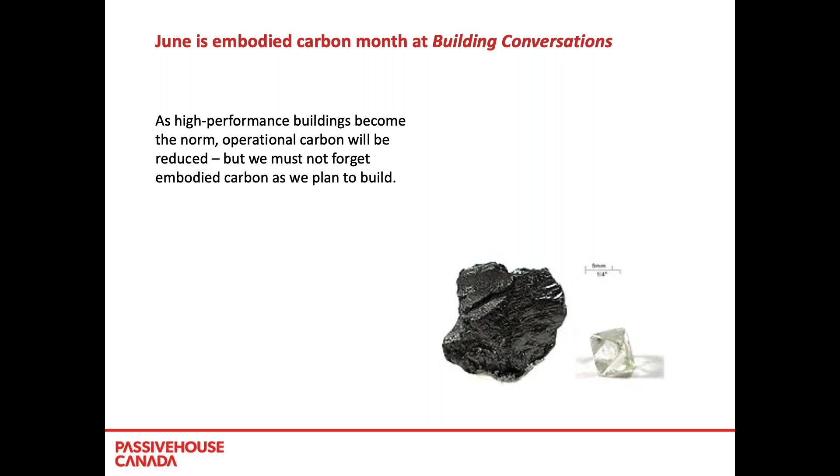So embodied carbon is the carbon footprint of a material, and it considers how many greenhouse gases are released throughout the supply chain, and it's often measured from cradle to factory gate or cradle to construction site. But our guest today, I know, will have a more fulsome description of what embodied carbon is. So let's move along.

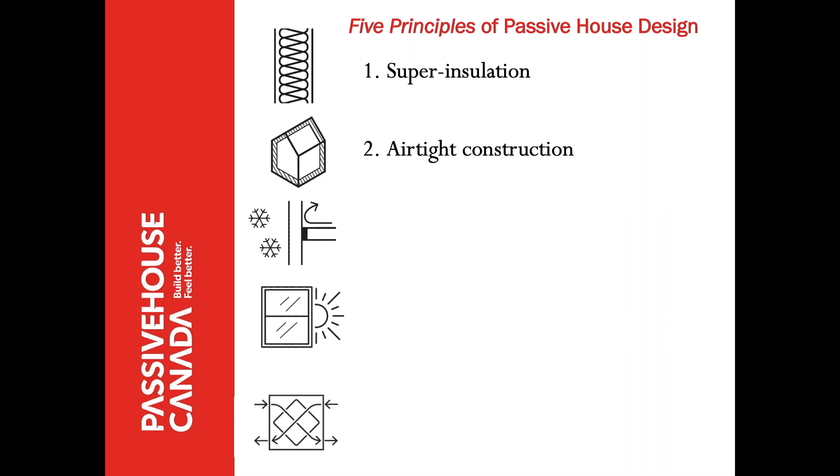So what is a passive house? And I'm going to assume that most of you on the webinar know a fair amount about passive house, but for those who don't, there are 5 principles of passive house design. And the first principle is that the building envelope has to be super insulated. So thick walls with lots of good quality insulation. And I know Anthony will be talking to us a bit about insulation later on. Second principle is that it has to be airtight construction. We can't have air leaving or entering the building.

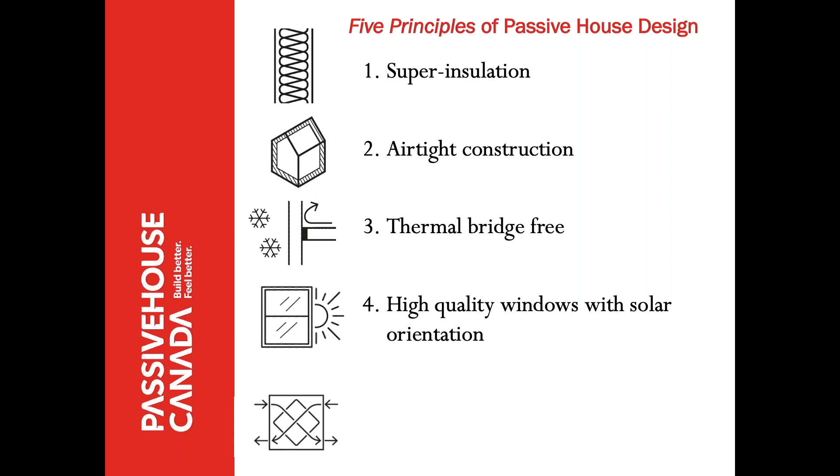Third principle is that it has to be thermal bridge free. We have to make sure there's no easy access for the cold or the heat to get in, or the cool or the warmth to get out. Fourth principle is that there must be high quality windows with solar orientation. So not only do we have to have good quality triple pane passive house windows, they have to be pointed in a way that maximizes the warmth that comes into the building in the cold months and minimizes the amount of heat that enters the building during the hot months.

And the fifth principle is there has to be a really top-notch ventilation system with heat recovery, and it's absolutely spectacular. When you add these 5 principles together, you get a healthy, comfortable, resilient, affordable, and low energy, low operational carbon building.

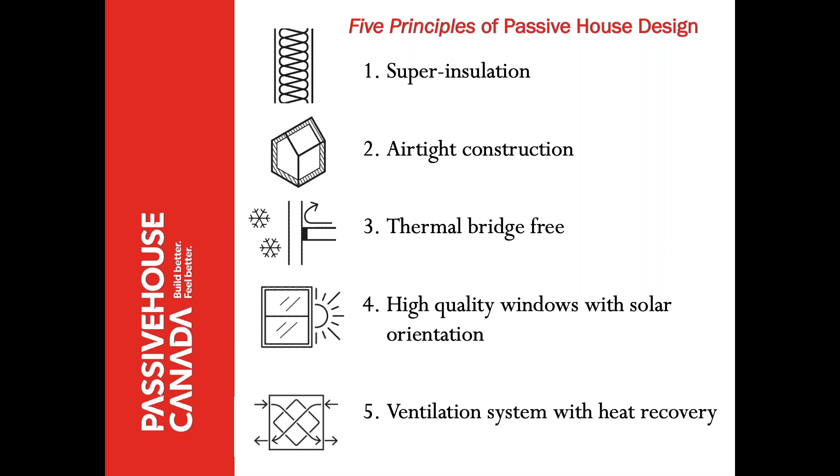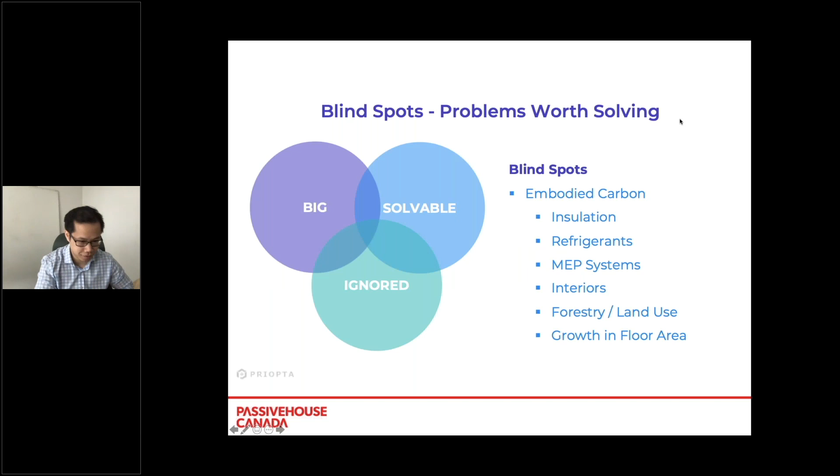So Anthony, now's the time for you to turn on your camera, and we'll make ourselves known to the folks in the audience here. As soon as I can get to, there we are. Perfect. Thanks for inviting me to this conversation. And thank you for being here. I have to turn on too. There we are. We're here. A little bit of technical. I've only done this about, I don't know, a dozen times or more. You think I'd understand by now.

But listen, thank you very much for being here and taking some time to talk to us about embodied carbon during Embodied Carbon Month at Building Conversations. Maybe you can start at the very beginning for people like me who are relatively new to high performance building, and in your words, talk to us about what embodied carbon is and why it is important that we pay attention to it. Perfect. Yeah, great. And actually, I think that in this first part, we probably don't even need any slides. I can just kind of talk through some of these things. Sure. And I've put a few of your slides in, so let me know when you want to move through them. Oh, sure. Sounds good.

Well, again, thank you for inviting me for this conversation. And in my time, I've gone through passive house certified training before as well, so I'm connected with some of the people in this community, and I've been really impressed with how much people within this passive house community have really taken up this topic. When we're talking about embodied carbon, we're really looking at the environmental impacts associated with all of the construction materials used in a building.

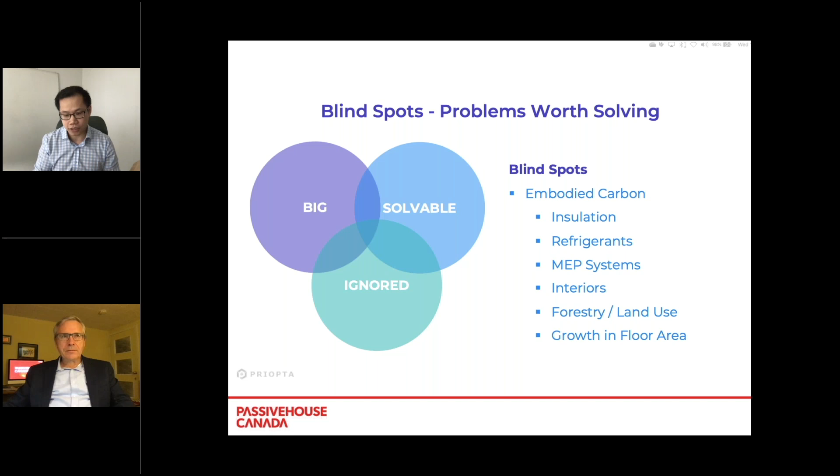I think last year when I wrote my first and probably only article so far, I titled it Embodied Carbon, the Blind Spot of the Building Industry. And it really has been a blind spot for a long time. There definitely have been certain people within the building industry that have focused on embodied carbon, but it's been a relatively ignored or neglected area. And only now do we start to see it actually being addressed on more construction projects.

So the first blind spot is the field of embodied carbon itself, right? As we talked about earlier, most of the focus has been on operational carbon. We haven't looked at embodied carbon as much, which makes up about 11% of global annual CO2 emissions. But even within the topic of embodied carbon, I think there are multiple blind spots. There are blind spots within the blind spot.

And so in this graphic, what I'm showing here is that when you're thinking about what problems are worth solving, you want to find a problem that's really big, that has big consequences, or in our case, a big amount of carbon emissions associated with it, and that it's solvable. So it's something that we can do something about. We have strategies for addressing or reducing those emissions. And then it's also ignored.

And that ignored piece is a big deal because as much as we've had a ton of focus on operational carbon, which is super important, I think because this topic has been so neglected, there's a ton of opportunity. There's a lot of emission reduction potential there.

So some of those subtopics that I mentioned there: within embodied carbon, within certain types of insulation, I think we've underestimated how significant those emissions are. So I have a slide later where we'll talk a bit about that, in particular with XPS and spray foam insulation. Refrigerants, actually, let me back up a bit.

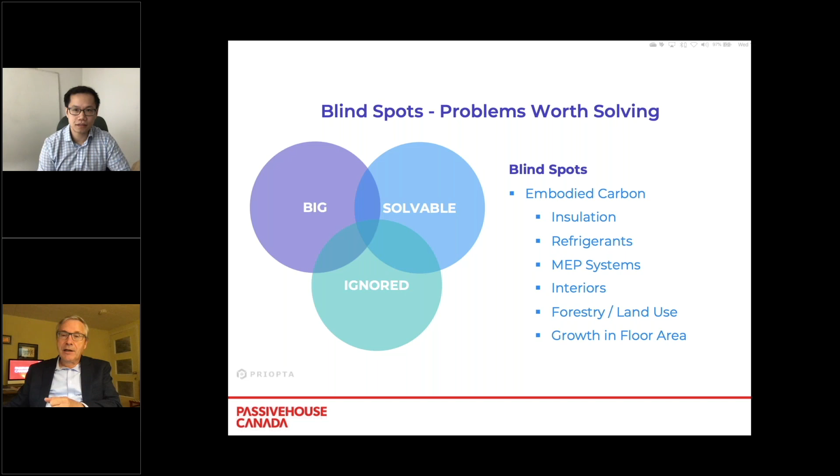So it's about architects working with structural engineers to minimize the amount of concrete and steel they need, to only use what they really need, and to pick the right concrete, to pick a concrete that has the lowest possible carbon footprint. Yeah, exactly.

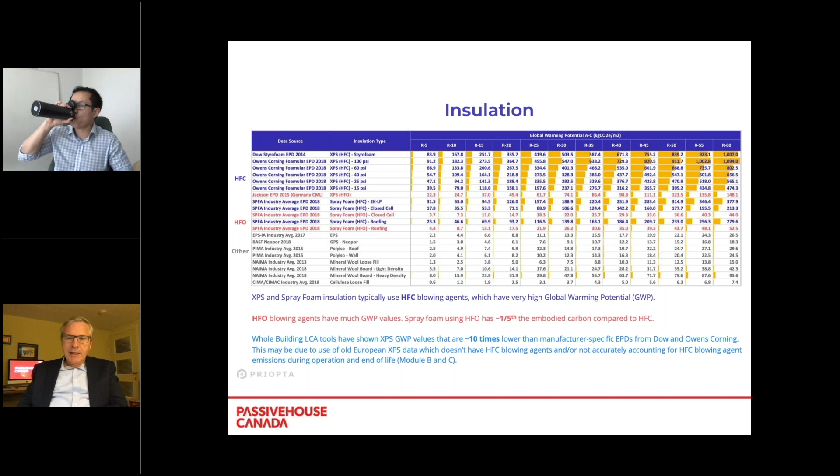Absolutely. And I know in the Passivhaus world, there are some practitioners who are recommending against, except where absolutely necessary, the use of expanding foams, because they're finding after a few years small cracks are appearing between the foam and the wood, allowing air leakage. And in a Passivhaus, air leakage is one of those fundamental fives I mentioned early on, we can't have any. So we're seeing those limited more and more, not only because of embodied carbon, but because of long-term performance issues.

Maybe with the reformulated products that are coming out, that will change. I guess we'll have to see as we go down the road. Totally. So I've got another slide here, policies and standards at different scales. Can I move to that one? Sure, yeah. Okay, so talk to us about these policies and standards.

So why address embodied carbon, or what are the drivers addressing it? There are things like voluntary standards, like LEED or CAGBC's Zero Carbon Building Standard, or the Living Future Institute, which has a few programs that focus on this. I've labeled a few of these policies or programs that are addressing it on a whole building basis.

So looking at the whole building, they may specify that you need to do a whole building life cycle assessment and then demonstrate some percentage reduction relative to an equivalent baseline building. And then some policies target individual materials, maybe specifically concrete or a few key materials. In that case, they're looking for EPDs, environmental product declarations from the manufacturer, with some threshold, maybe a max allowable limit, or some performance benefit relative to a benchmark. So there are policies targeting both levels.

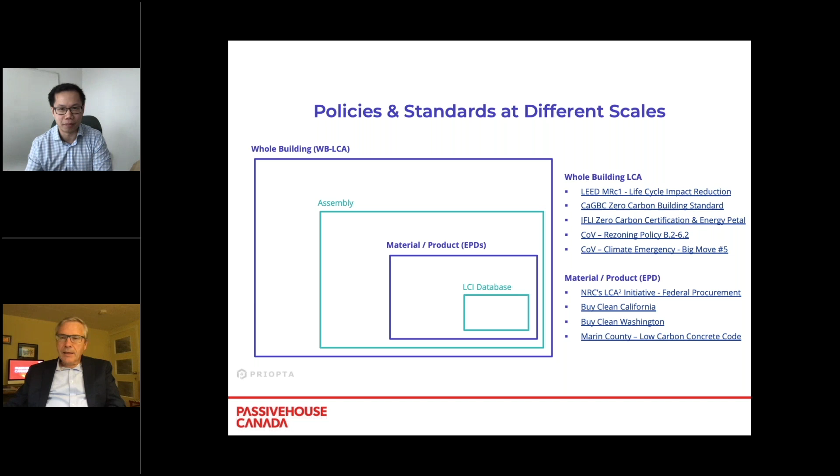Did you say you have a slide on that? Maybe I can just do a quick plug on that piece, or maybe I do that at the end. Well, there we are, there's the slide. I can always go backwards.

I'm going to ask you to talk to us about ECN Vancouver, and I know Passive House Canada is involved with the international embodied carbon network. We are going to be getting more involved, and we are already taking this message about the importance of embodied carbon to the government decision makers, to our contacts in business and industry.

So that they begin to understand that, as I said at the very beginning, as we drive down operational carbon, more and more government attention is being paid to embodied carbon. So it's smart for all of us to get ahead of what's coming down the pike and prepare for new regulations when it comes to embodied carbon. From a Passive House Canada perspective, one of the key reasons we're getting involved is to make sure our members know what's coming. But you wanted to talk a little about ECN Vancouver, Anthony, and I cut you off.

Yeah, that's a great point. So first off, Embodied Carbon Network is actually getting rebranded. We're kind of in a bit of a brand transition. So even ECN Vancouver is going to soon be called CLF Vancouver, Carbon Leadership Forum Vancouver. And that's kind of aligned with the parent group that helped create the Embodied Carbon Network, to reduce the confusion.

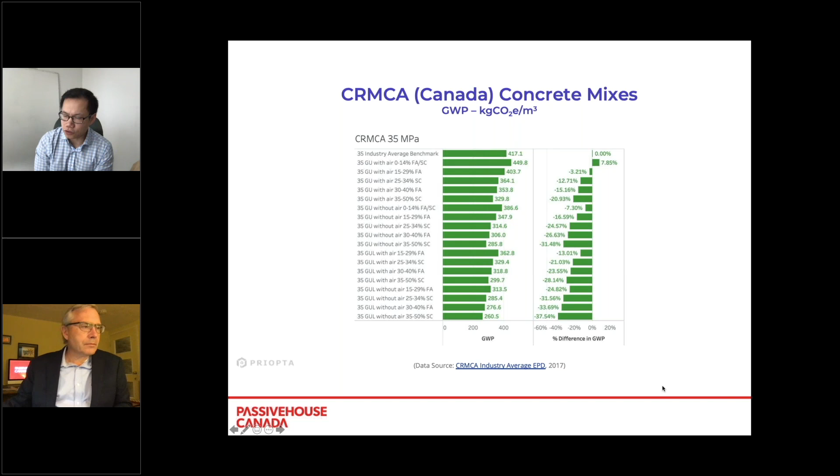Wood fiber insulation, so is that maybe like Gutex? I'm not sure how common it is, so I'm not familiar on that front. I did previously try to search and found that Gutex does have an EPD, but I think it's a European EPD, so I'm not sure if it's directly comparable. Generally speaking, those numbers are relatively low, but I don't have the specific number off the top of my head.

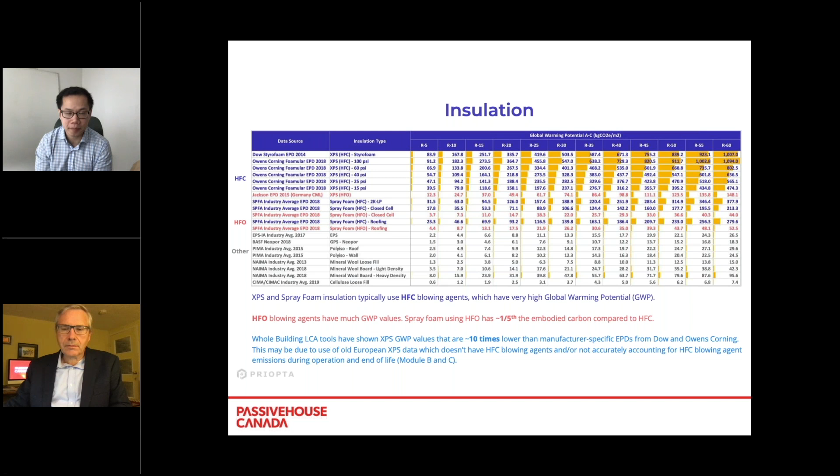Okay, and that's, I think, the time we have left.

Good. Well listen, Anthony, we could probably go on for, judging by the questions and the interest and how deep this topic is, we could perhaps carry on for another hour, but our time has come to an end for this time. And I would encourage everyone to do two things.